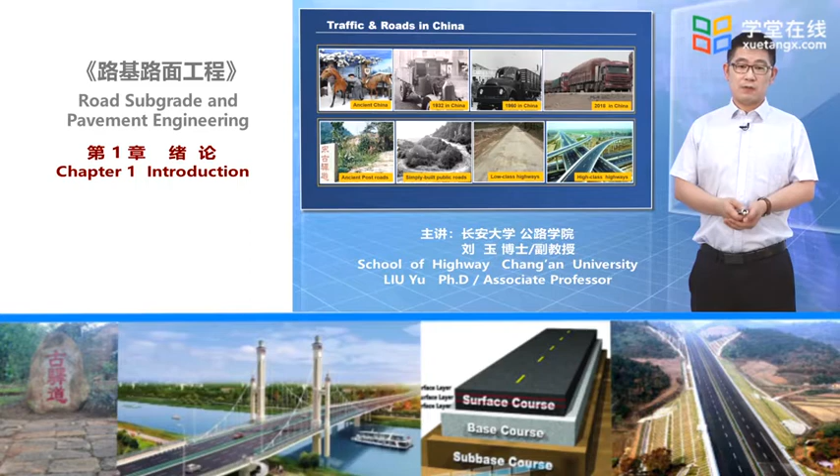Chapter 1, Introduction. In ancient China, from 1066 BC to 1912, people traveled by horse or carriages. In order to meet traffic needs, post roads were built from 1066 BC. Some roads were built with bricks or block stones, while some others were built without a hard surface.

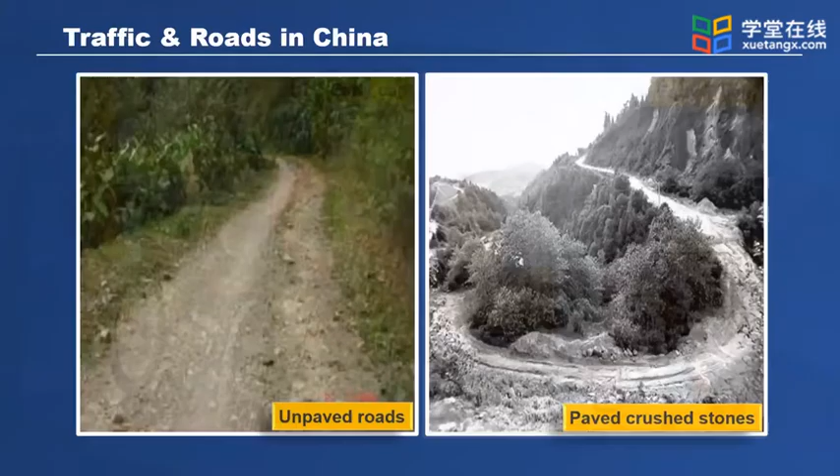At the end of the Qing dynasty, automobiles were imported to China and brought new demands for roads. The ancient post roads were upgraded, and simply built public roads were built to meet the new demands. From 1912 to 1949, thousands of simply built public roads were gradually developed in China. For running automobiles, those roads had a smoother surface compared with the post roads.

When the People's Republic of China was founded in 1949, automobile ownership was less than 50,000. For the economic recovery, in 1956, the first truck was made in China. After 4 years, in 1960, the first heavy-loaded truck was made in China. At the end of the 1980s, automobile ownership in China reached 1,680,000, more than 30 times that in 1949.

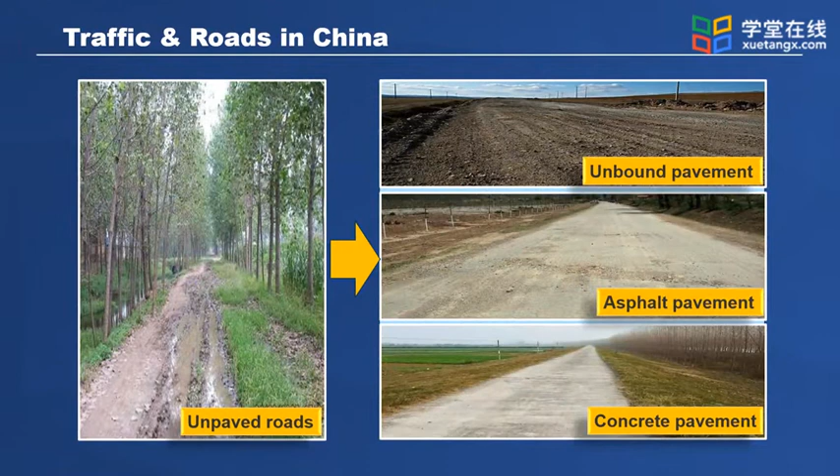Then, take a look at the Chinese roads. In 1949, the road mileage was less than 130,000 kilometers, and some of them were built without a hard surface and could not meet the traffic needs on rainy days. There was an urgent need for all-weather highways. Against this background, crushed stones, asphalt, concrete, and cement were used to build the roads.

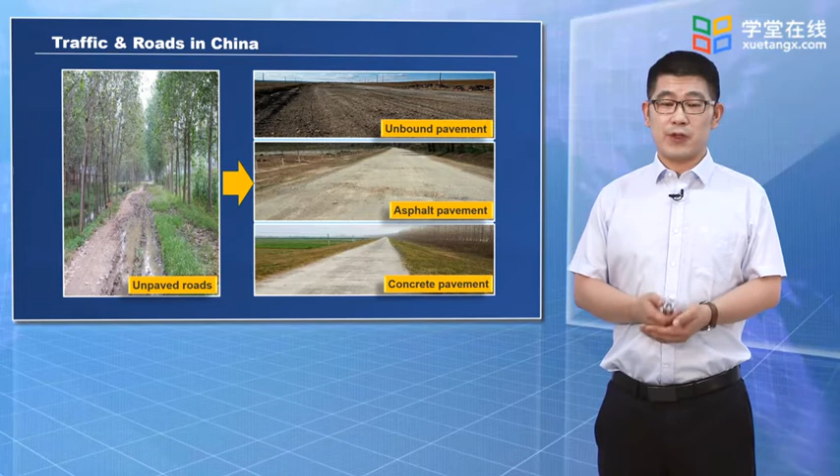From 1949 to 1980, more than 800,000 kilometers of highways were built. Most of the roads had a hard surface. Even though those roads were not thick, they were significant for running vehicles in all weather conditions. From the 1980s, more and more heavy loads were running on the roads. The roads, with thin surfaces, could not meet the traffic needs, nor the heavy load truck needs.

From the 1980s to present, millions of high-class roads have been built with higher quality materials, thick pavement layers, comprehensive design, and strict construction. That's the history of the traffic and the roads of China.

With the traffic evolution from horse carriages to heavy load trucks, the roads appeared in four stages: the ancient post roads for horses or carriages, the simply built public roads for the early automobiles, the early highways for light load trucks, and the high-class highways for heavy load trucks. Those four stages of development are closely related to subgrade and pavement.

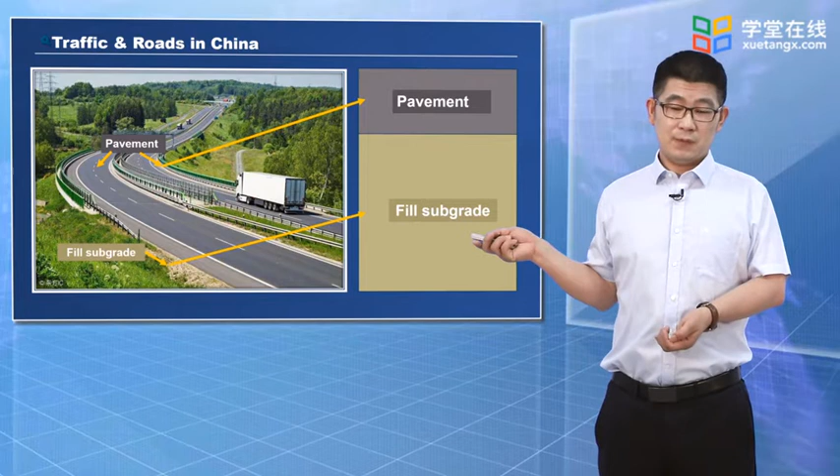The topic of this course is subgrade and pavement. Pavement is the hard surface of a road, while subgrade is the underlying structure of the road. What's the subgrade? Subgrade is the layered structure which is composed of the roadbeds, embankments, and ground soils. The roadbeds may further divide into upper roadbeds and lower roadbeds, and the embankments divide into upper embankments and lower embankments.

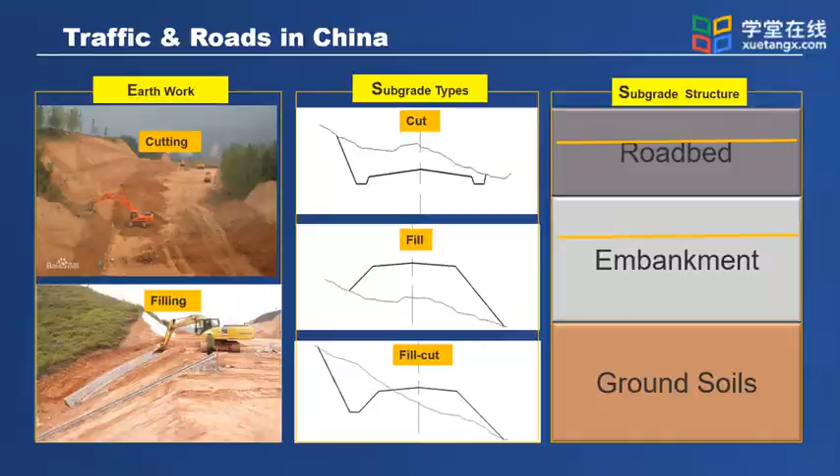The layered structure is formed through the earthwork of cutting or filling. When the road needs to pass through a mountain, cutting earthwork is performed and the cut subgrade is formed. When the road needs to pass over lower land, filling earthwork is needed, and the fill subgrade is formed. When both cutting and filling earthwork are needed at the same time, the cut and fill subgrade is formed. Additional information will be introduced in Chapter 4.

After the subgrade is formed, one option is to open it to traffic. Without a hard surface, the road is called an unpaved road. Another option is to build it with a hard surface. The road is called a paved road. Nowadays, there are block pavements, crushed stone pavements, concrete pavements, and asphalt pavements. We mainly focus on asphalt pavements and cement concrete pavements.

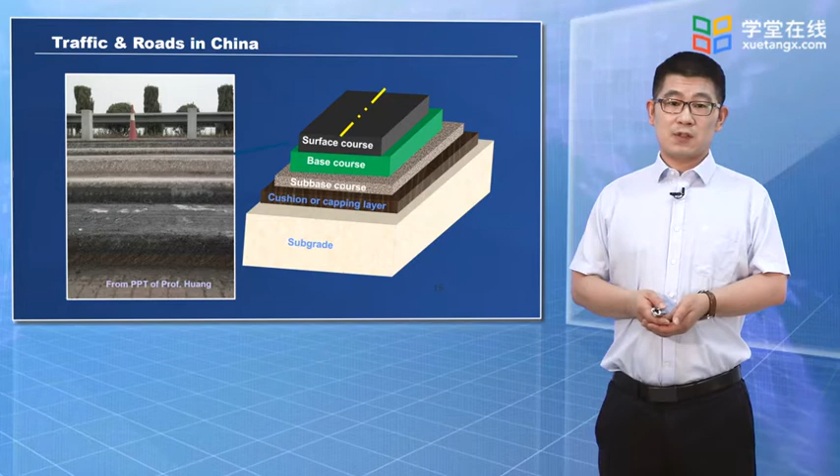Pavement is a layered structure seated on subgrade. After subgrade construction, a cushion or capping layer is paved on the subgrade, then the subbase, base, and surface are built. Obviously, pavement is a multi-layered structure, which is built by different materials with different requirements. In Chapters 5 and 6 of this online course, we will discuss how to design this layered structure.

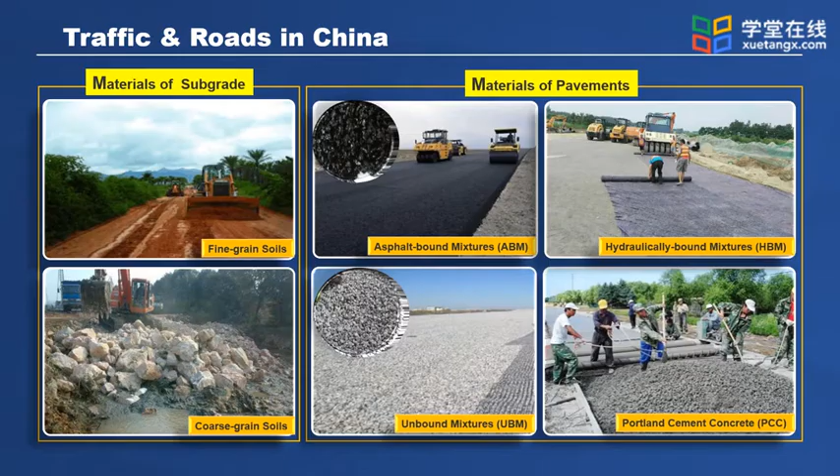Roads are made of materials. There is a wide range of materials. Fine-grained and coarse-grained soils are used for building our subgrade. Four types of materials: ABM, HBM, UBM, and PCC are used for the pavements. ABM is used in asphalt pavement surface and base. HBM is commonly used in the base layer. UBM is commonly used in the cushion layer, base, and subbase. And PCC is used as a concrete pavement surface. Details of the road materials will be discussed in Chapter 3.

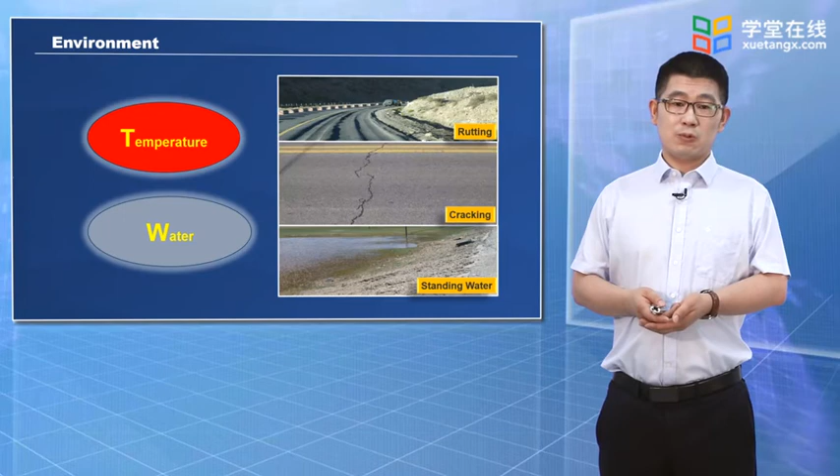Temperature and water not only influence the road materials' properties, but also induce additional stresses. For instance, at high temperature, asphalt becomes soft, and rutting may occur under the load of trucks. While at low temperature, asphalt becomes stiffer, and cracking may occur. Temperature change may result in concrete cracking. Excessive water content may result in subgrade instability and pavement damage. Obviously, environmental conditions are critical to subgrade and pavement engineering. In this online course, temperature and water are considered as the major environmental conditions. In Chapter 2, details will be discussed.

Through carefully considering materials, traffic, and environmental conditions, the key task of road subgrade and pavement engineering is to create and maintain a strong, stable, durable, safe, and comfortable road. In other words, roads should have certain serviceability, including road capacity and functionality. The road capacities include stiffness, strength, stability, and durability. And the road functionalities include skid resistance and smoothness. Once the road, subgrade, or pavement fails to meet the serviceability, the corresponding distresses may occur. They may be rutting, fatigue cracking, sliding, or thermal cracking.

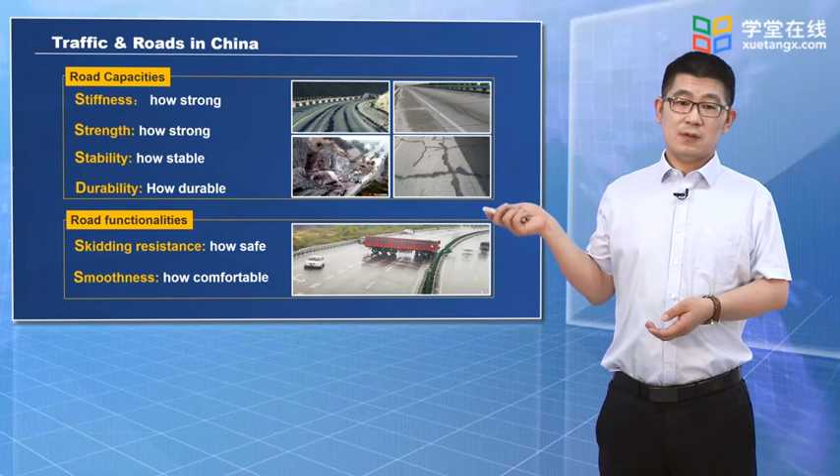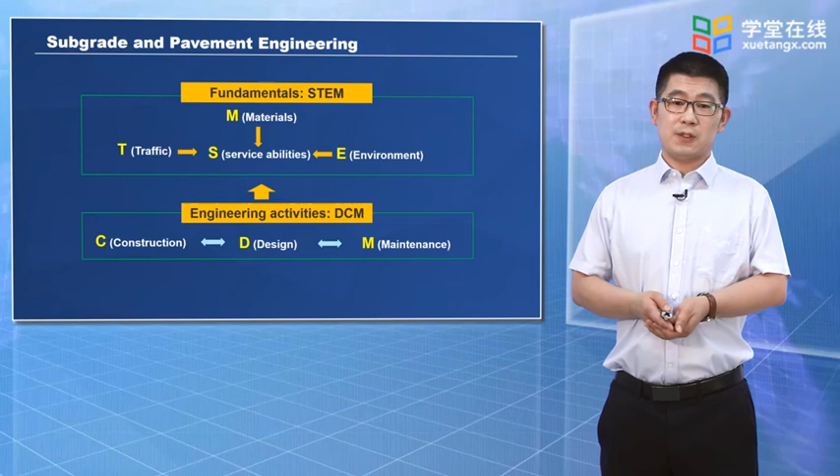Now we come back to our topic: subgrade and pavement engineering. Obviously, our target is to build a road with certain serviceability. To reach this target, we should have knowledge of traffic, environment, and materials, know the prospective serviceabilities, and do our engineering work such as design, construction, and maintenance. Traffic, environment, and materials are the key fundamentals for obtaining the serviceability of a road. Design, construction, and maintenance are the key engineering activities to achieve the serviceability requirement. In summary, subgrade and pavement engineering is about the activities of design, construction, and maintenance, considering traffic, environment, and materials, for achieving certain serviceability.

Now, at the end of this lecture, we discuss the main contents, which are divided into fundamentals and applications. The fundamentals are traffic, environment, and materials, which will be discussed in Chapters 2 and 3. And the applications are about the design of subgrade, asphalt pavement, and concrete pavement, which will be discussed in Chapters 4, 5, and 6. In sum, this online course is TEM plus 3D. By the way, construction and maintenance are not included in this online course, since they are included in other courses. Okay, that's all for today's lecture.